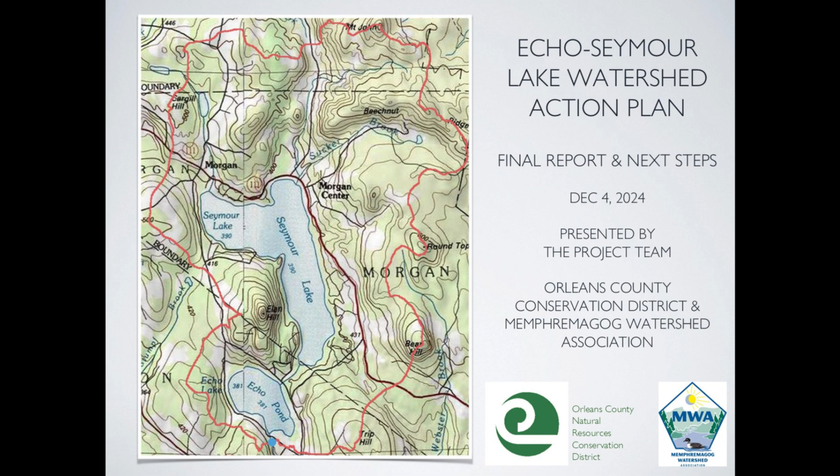And I'm going to try to fire up my slides here. Good, great. So I'll introduce myself. I'm joined today by my two amazing colleagues from MWA, and I'll let them introduce themselves when they begin to speak, and also the Lake Association leadership and water quality advocates that have been so instrumental in helping us do this LWAP. We're hoping this meeting only takes an hour and a half. We definitely want to leave lots of time for your reflections. Consider it a good opportunity to ask questions and almost like the initiation of your brainstorming session on what you want to do with this actionable plan.

So first of all, I do want to thank a lot of people. I want to thank all of you for your interest and participation in the LWAP, and specifically some of your Lake Association leaders. Tom and Holly from Echo have been just super helpful to us. Peggy and Tracy and Rhonda from Seymour, helping us do boat tours and communicate and strategize. Their commitment to your lake associations is really impressive. They spend a lot of time pushing forward these water quality issues. So you guys are lucky, and we're lucky too.

I also want to thank the 12 families that gave us the time to do lake-wise assessments. I'm hoping, I don't know if any of you are here. We also want to thank the staff and town people of Charleston and Morgan, including Colleen Kellogg, Charleston Assistant Town Clerk. She was just amazing in communicating with us and getting the select board on board. She's really super helpful. And also Wendell Hastings, Terry Rollins and Eric Pope, Bruce Remick, Larry Labor, and Peter and Tim, just all been really helpful.

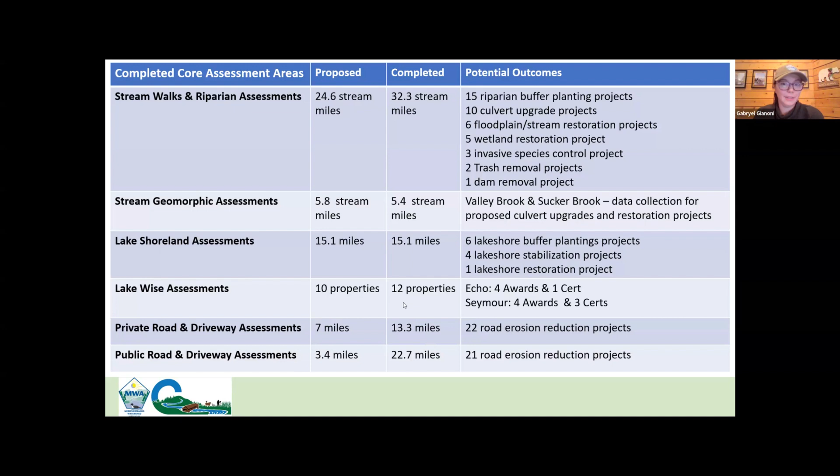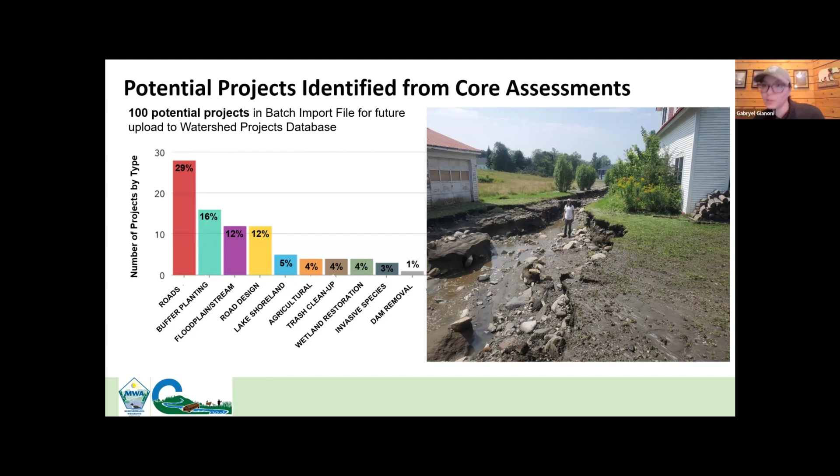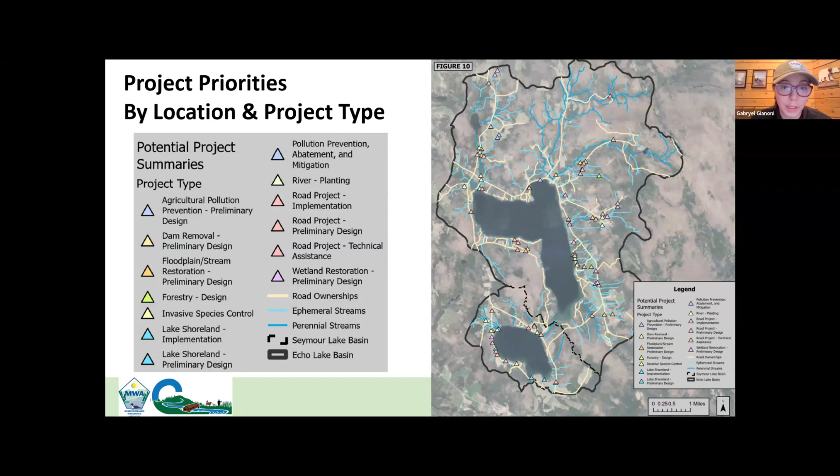So the goals for water quality improvement projects prioritized in the whole watershed - if we were able to get all of these 100 projects done and implemented, we could have phosphorus inputs reduced by 143 pounds annually, which is actually incredible. And that equates to reducing about 250 tons annually of sediment going straight to the lake. So those are really big goals there. It seems like a lot, but it is achievable if you take on small projects every year - they add up really quickly.

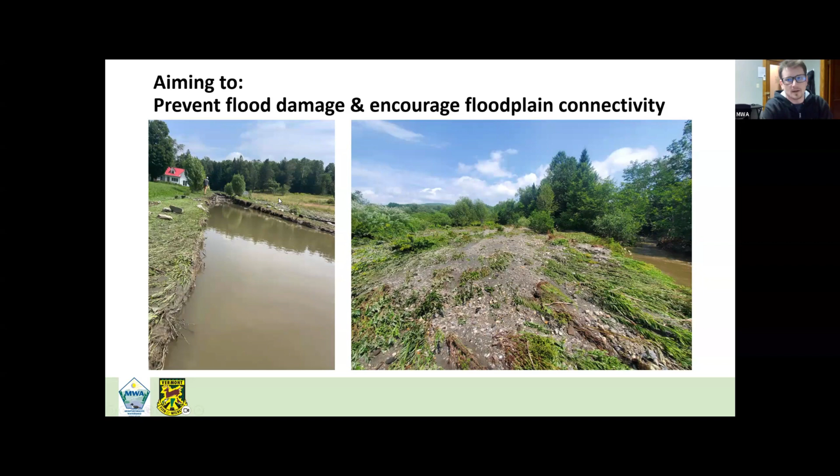This parcel was so overwhelmed with sediment that it clogged up the channel at one point, and it jumped down a neighboring property and took out a driveway. We kind of combined this design to address flood mitigation as well as restoration.

So there's a lot going on in these slides. I'm not going to go over every single detail — they are all available for you to pore over. Bevan and I will be sure to provide links to all of these.

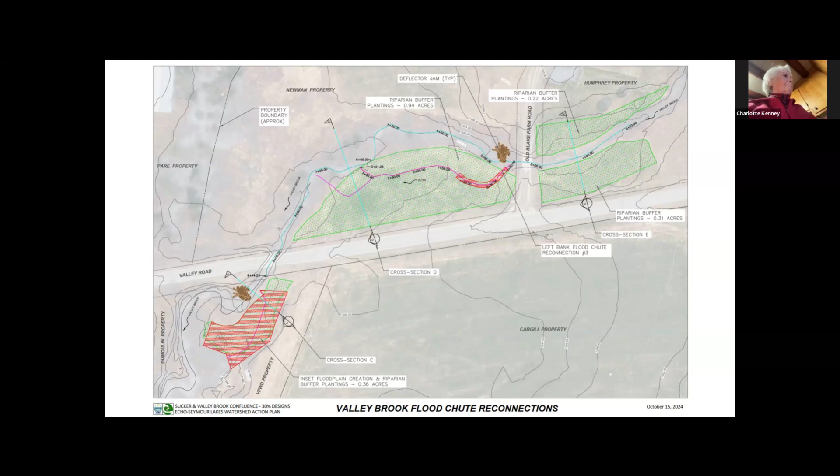That was a relatively lucrative phosphorus reduction project. We're talking $150,000 to implement, which includes engineering, permitting, planting trees, doing the earthwork, and closing out the contract, for upwards of 10 kilograms of phosphorus potentially, which gives us anywhere from $10,000 to $20,000. We settled on about $14,000 per kilogram of phosphorus, which falls right into the sweet spot for the average reduction rate and average cost per kilogram of reduced phosphorus.

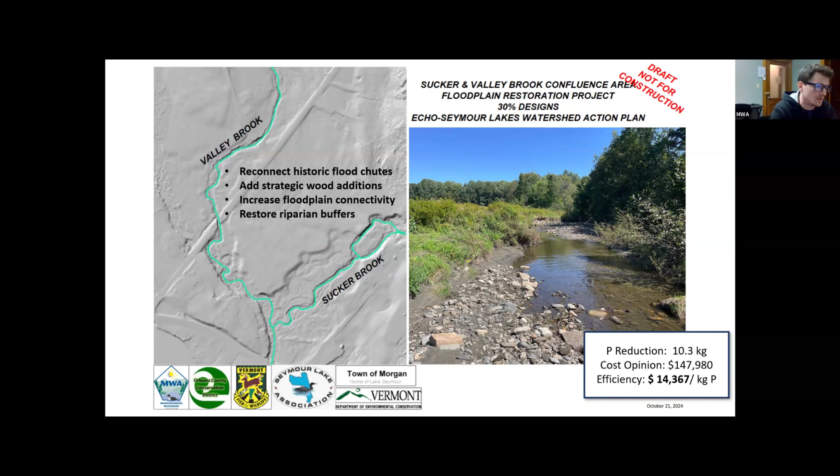This is a pretty competitive project, and MWA aims to continue working with Fish and Wildlife to progress these designs. There's a lot of details to work out, especially with flood mitigation and the flood levee potential. It's hard to get that conversation on the table right now because there's so much flood disaster recovery still going on that these restoration projects are taking a back seat to emergency response projects. So we are still going to work towards developing that project.

Moving over to Echo Lake, we really wanted to evaluate West Echo Lake Road. There had been some improvements, then severe washouts, then more improvements, and then more severe washouts and additional improvements.

So we took a really comprehensive approach. We surveyed the entire road, all the channels, all the stream crossings, all the ditches, all the culverts, all the driveway crossings. And we did a full drainage analysis for every point along that road where water crosses either below it or above it, depending on how much it rains.

We did a drainage area analysis to determine how many acres drain to that point. What's the runoff coefficient? Is it agricultural fields where water's going to fly right off of it, or is it nice, shallow, thick forest where water is going to take longer to make its way down, or is it a smaller drainage area? All that information was used to size, place, and locate culverts where they're really needed.

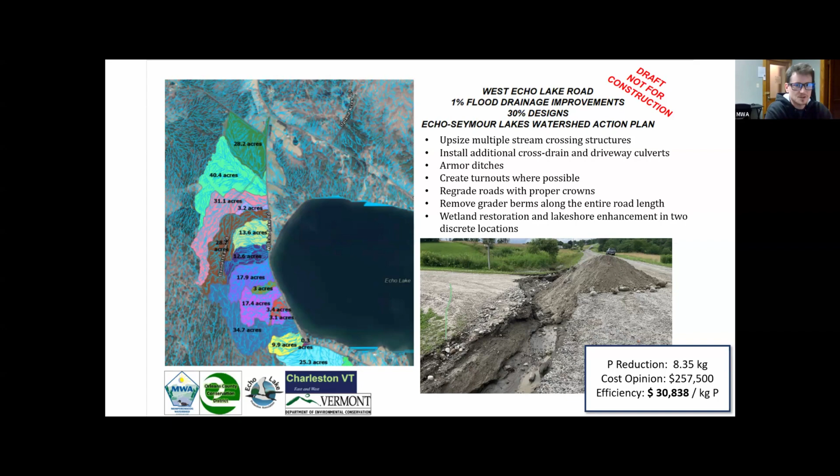A lot of these improvements, for instance along the lake, involve adding stone lined ditches—these red hatch lines—to try to trap sediment and prevent head cutting along the roadside ditches. These culverts in green, the little diagonals, are sized based on the drainage area: a drainage area of 3 acres gets a small culvert, while a drainage area of 18 acres gets a much wider culvert.

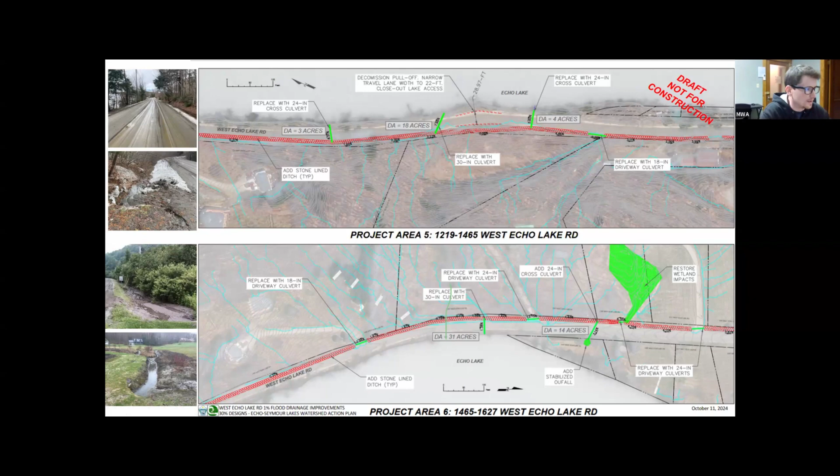The other considerations we have are turnouts, or where we've seen impacts to wetlands that have been ditched. We also see a lot of driveway culverts where you'll have a hill with a ditch coming down, passing through 3, 4, maybe 5 driveway culverts. And each culvert is progressively smaller as you go down the hill, which is the reverse of what we really want to see. We want culverts sized appropriately.

A lot of the work we proposed on West Echo Lake Road are driveway culvert improvements, so that they don't just back water over top, blow out, and then catastrophically blow out the next one, two, or three driveway culverts. So there are opportunities for landowners to work with the towns.

Some towns have arrangements where if you buy the pipe, they might put it in for you. What we'd like to see is a couple of neighbors or landowners getting together and upgrading their driveway culverts collectively. You can save money that way by hiring one person to do it. Better yet, if somebody's got a tractor and is willing to do it themselves.

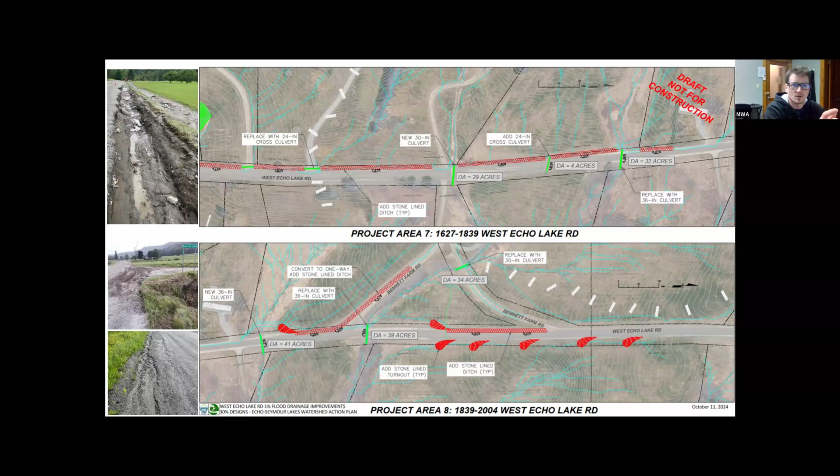But moreover, it's pretty hard to justify doing just one of them if there's two problematic ones immediately above or below. It's like it takes a village, right? The whole drainage network has to be suitable. You can't have that one little weak link, or you're still going to face problems.

And these are what some of these practices look like. Stone lined ditching—that's the most beautiful stone lined ditch I've ever seen. They don't usually end up that way. But I'm sure the roads folks in Charleston and Morgan are very well suited and experienced in doing these upgrades. Some of them can be little check dams, such as this one.

There's a lot of rules and regulations on town roads in terms of how far off the shore, or how much or what type of stone you need for a certain percent slope. These are things available in published resources like the Better Roads Manual, and that's what our designs are based on. These are based on tried and true practices, Vermont Agency of Transportation standards, and also practices borrowed from elsewhere in the country.

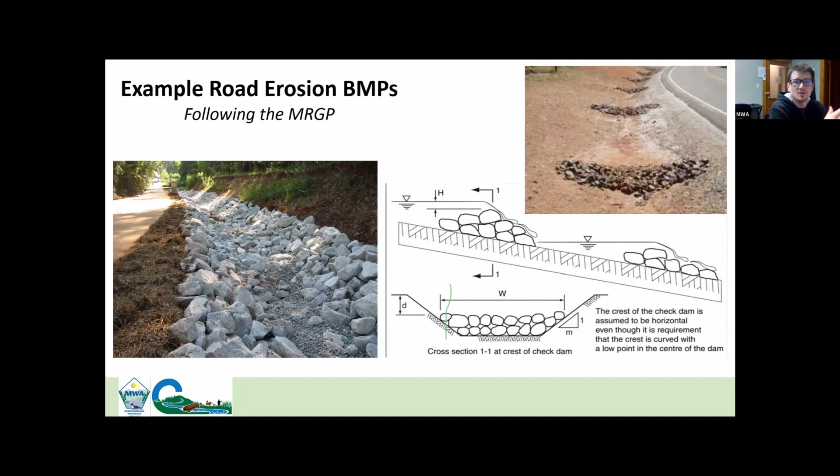So we are providing these designs to the towns and have met with them following that to emphasize that this is a roadmap—it's not an order to implement immediately. These items can be chipped away at progressively, so long as you're working on one singular catchment at a time, so that your improvements aren't lost before the next storm. You want them to be resilient. You've got to build them in sequence, right?

These are more practices, just examples of what these BMPs might look like, and they're really applicable for private driveways and private roads too. We provide these designs for the towns, but there's nothing stopping a landowner with a really steep driveway or poor drainage from utilizing these practices and drawing from these standards, so that driveways and private or association-based roads can have the same good functioning, proper drainage, and flood resilience. Protect the lake.

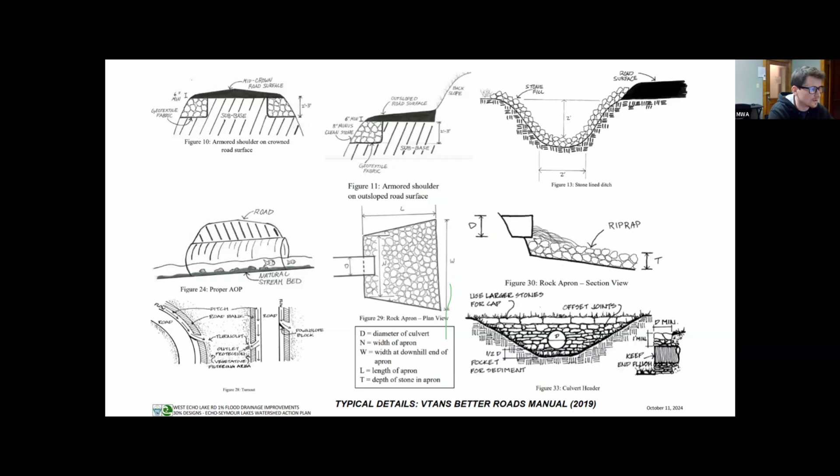We did the same thing for Toad Pond Road. This was a very eye-opening event from this past summer. Gabby and I had already peppered this road with, as she'll say, dots and lines, prior to the July 2024 floods, and the damage just confirmed what we had suspected—that it was a very vulnerable road with a very concentrated drainage network.

Our designs for this focused on disconnecting the drainage network wherever possible, spreading the water out. If implemented at whole scale, this is a very expensive project—over $500,000. There's a ton of crushed stone, a ton of culvert pipes required, a lot of earthworks, and engineering for the upstream Sucker Brook crossing.

We're talking $50,000 per kilogram of phosphorus, based on the kind of calculator we use for these practices. It proposed that 12 kilograms of phosphorus could be reduced. Well, I don't know about you all, but I think more than 12 kilograms of phosphorus came off that road this summer, so I think that's a gross underestimation.

And we did rebuild the road, and the Town of Morgan did upgrade a lot of those structures. But I think there are still opportunities to improve flood resilience and try to prevent further washouts from happening again.

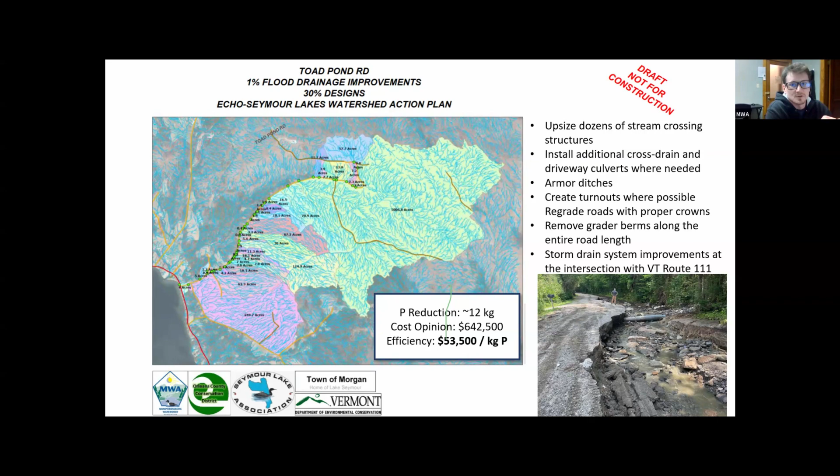Those practices look very similar to the West Echo Lake Road approach: upsizing pipes based on drainage areas and adding turnouts. A lot of these turnouts need to go onto private land because there's nowhere else to put the water. Being able to accept that water and put in the practice correctly, so it's not affecting improvements on the property, is important but necessary.

Lots of stone lined ditching. For instance, down at the bottom of Toad Pond Road, there's a storm drain system that became so overwhelmed during the floods that it completely backed up, and all that water went across Route 111. That system probably needs to be upgraded, since who knows when it was built—could have been the 40s or 50s—and we're getting a lot more liquid precipitation these days.

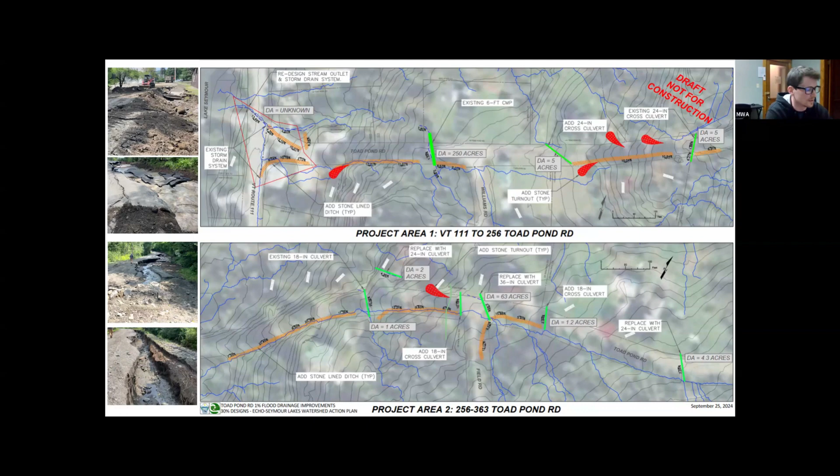These design packages—we're just showing you a couple of sheets—go all the way up to the top of the road. This is a 2-mile road, and there are best management practices recommended along the entire way. So this is a roadmap for the towns to use. They can go out and verify, like, okay, this design recommends a 36-inch pipe here, but when we replaced it we put in a 30-inch pipe—are we comfortable with that, or would we want to upsize it? It's essentially a checklist, a fail-safe the towns can use to evaluate improvements that have been made or still need to be made.

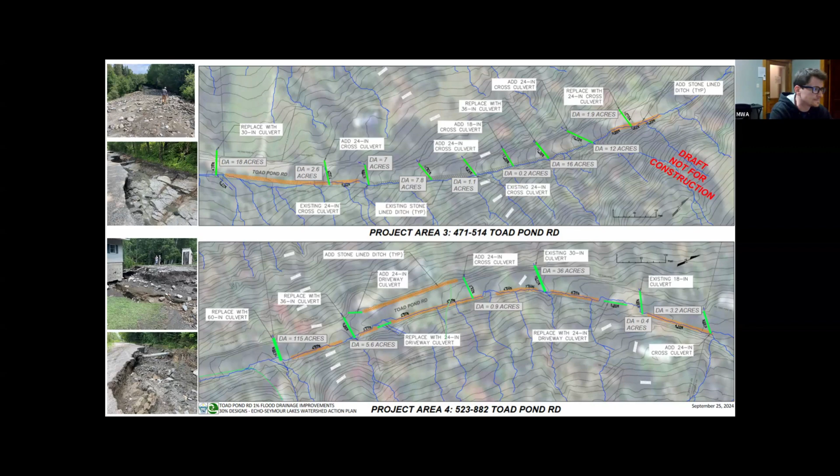We did submit this design set to Fish and Wildlife's access area manager, and there are certain things we can and can't do in access areas. One, you're not allowed to swim. Two, you're not allowed to picnic. It is first and foremost a boat launch—it is not an access area for any other purposes, technically.

So what that means is we had proposed a little stone infiltration staircase down to this little crescent beach area. Can't do that—can't encourage swimming or other uses at a boat ramp because it's unsafe, and technically against the rules.

So if people were interested, we could potentially plant off this entire corner to protect runoff coming off West Echo Lake, or capture runoff coming off West Echo Lake Road. We could try using some driftwood log stabilization practices, which we've done elsewhere, to prevent further shoreland erosion—there's very moderate erosion in this little corner on the southwest.

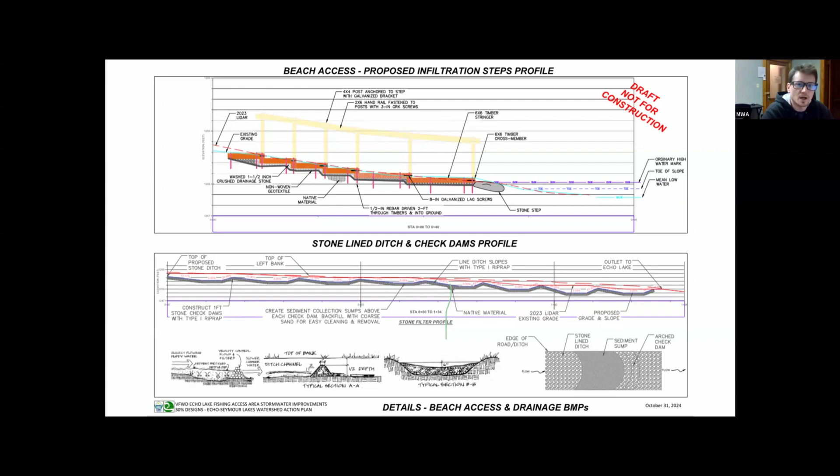So those are the designs that we produced. Again, those are just some rapid fire example sheets from each of the design packages. There's more pages for each of those if you want to peruse.

Gabby did some really lovely photo renderings for the Echo Access Area one, and there's a bunch of engineering

details for the other ones. So this is kind of our review slide from those projects. We just yesterday got feedback from the access area manager about Echo.

We can propose some modifications to those designs. We don't have budget to do any design revisions, but if there's a lot of groundswell support from the Echo Association that they want to see some of these practices in, we might be able to get some of those things done in the spring, and if maintenance obligations are being taken on by some local partners.

The Sucker Brook floodplain project, we have a lot of details to work out in terms of design and engineering and permitting, but MWA will be seeking a final design grant in the next calendar year to move that project forward. We have met with the Charleston road foreman and the select board to go over the designs

for West Echo Lake Road. Just essentially make our recommendations known, talk about the priority areas that we discussed.

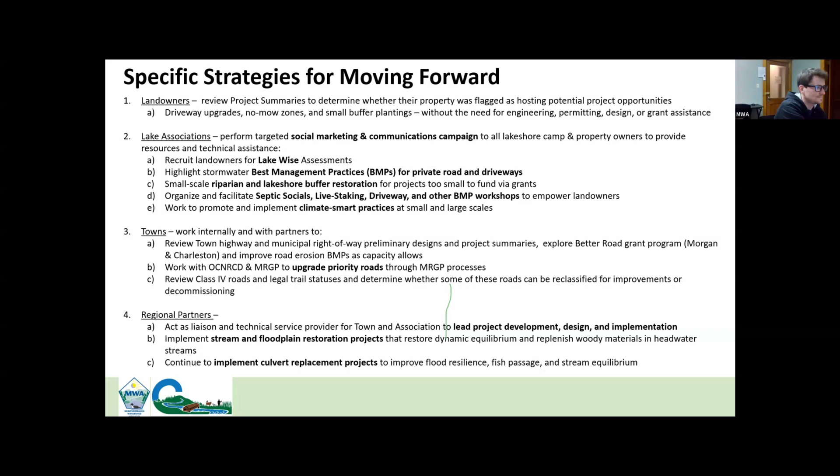Thank you, Patrick and Gabby, again for all your great work on these summaries. These two slides in particular—you'll get all of Patrick's slides—the one with specific strategies and the one with broader recommendations. I'll make sure you guys get those. I really like what Patrick emphasized when we chatted: if you guys wanted to create a plan of attack, just driveways, helping people—have a group of you that goes out and helps them look at their driveways, invites Northwoods, or helps them get the BMP fact sheets from Lake Wise for open top culverts. There's a lot you guys can do there; that's one of those low hanging fruits.

I'm going to share my last slide—it's not much. One idea we have to kick this off: workshops in the spring. We have this idea of putting on a workshop for Lake Association folks to attend, essentially training. We think we have a landowner who would be willing to let us work on their shoreland, their driveway, and a river and stream bank—planting buffers, cutting, harvesting, transplanting, installing live-stake willow and dogwood cuttings, addressing erosion along a driveway, and installing a culvert properly. These are things we could do in one day on a single workshop on one property that touches three different work sectors.

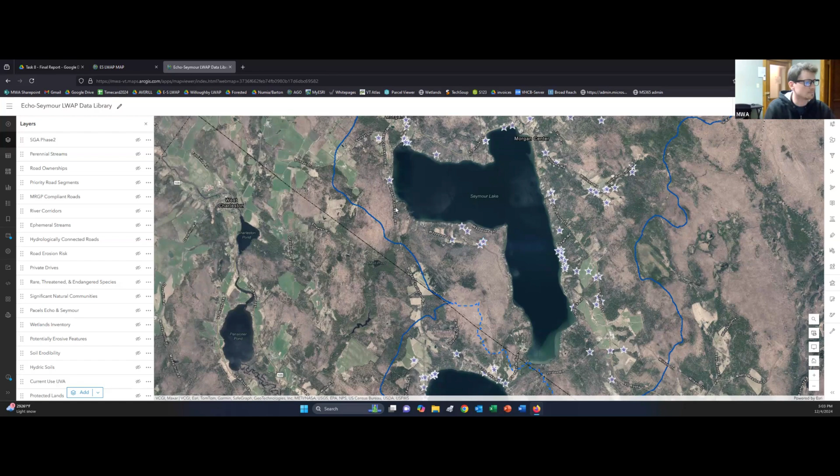All of these deliverables will be compiled neatly for Bevan to disseminate and for the lake associations to curate and manage. I think that's all I had to say. Yeah, because people at the prioritization meeting asked, well, how can I find out if my property was prioritized or is in the list of 100? So this is how, because they can probably find themselves by looking at these stars.

And the lake associations are also in possession of what we call the shoreland prioritization list, which takes all the properties along the lake shore that we went through on our shoreland assessments on the boat and again on aerial maps, and we made recommendations or prioritized every one of those properties. In Echo, there's like 60, and in Seymour there's like 150 or something. Those little spreadsheets contain project opportunities that are too small to be a purple star. So if it's a 40-foot long, 10-foot wide buffer that a tiny camp could implement, we didn't turn that into a project summary because nobody's ever going to get a grant to do that. But the lake associations have all that information, so you can cross-reference both of those.

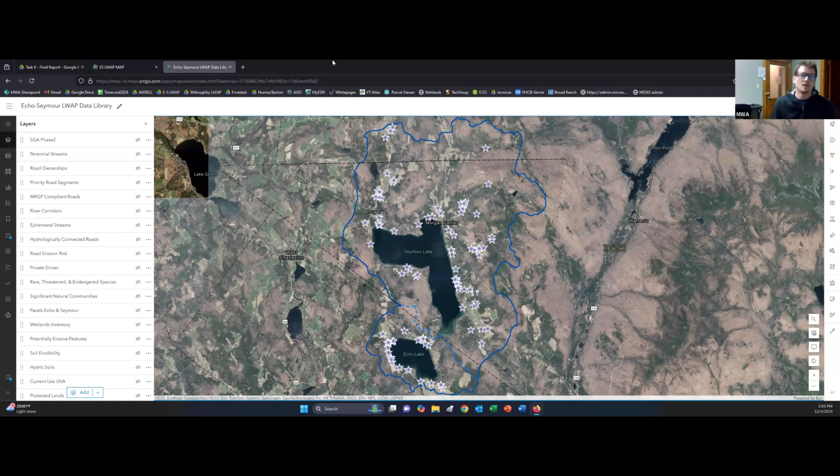The purple stars are the bigger projects that may or may not warrant a grant or engineering or design or permitting. Those lakeshore spreadsheets, the prioritization, those are the ones where you as the point of contact from the lake association can talk to your neighbor and say, hey, we see here that there were opportunities to do so and so, what do you think? Yeah, Tom's good at that, and Tracy, he'll ask anyone to do it.